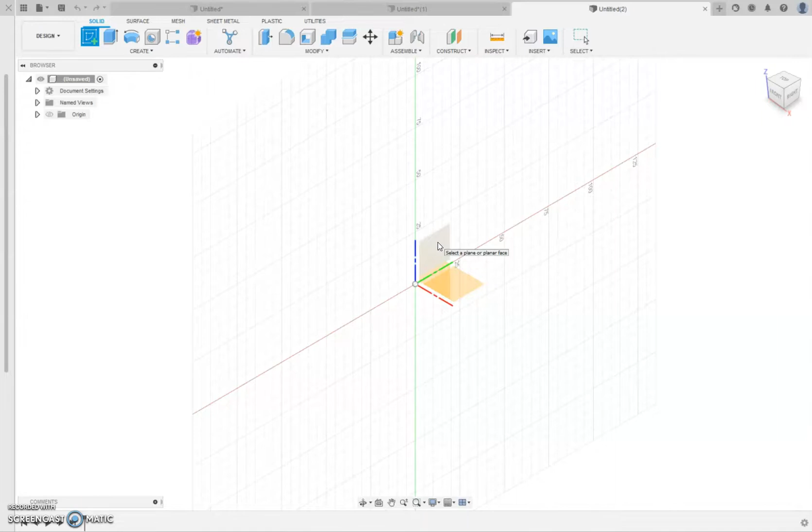I'm going to do a new tool today that's going to look at patterns. Basically, if you have something that has some sort of repeating grid or repeating feature, you can use this. There's a two-dimensional variation of it, as well as a three-dimensional variation of it, so I'll show you in 2D. Right down here, we do have mirror, which copies over a line. We have circular, which copies around a shape or a spot, and we have rectangular. But for this one, I'm just going to focus on rectangular pattern.

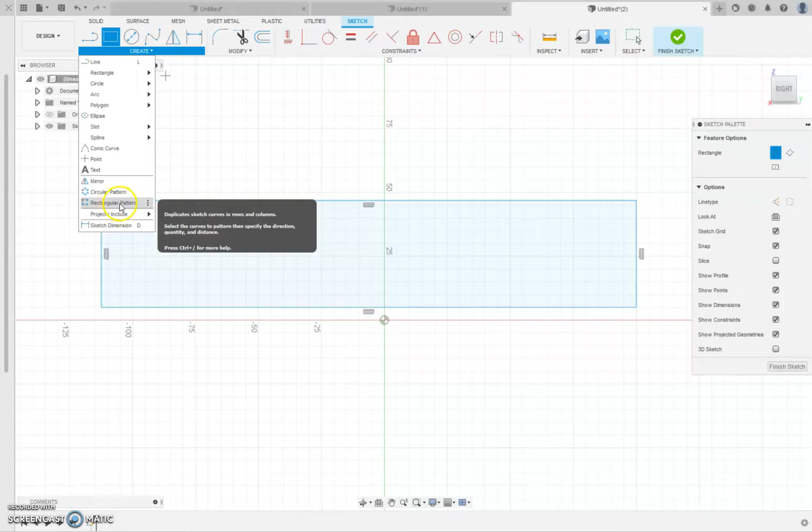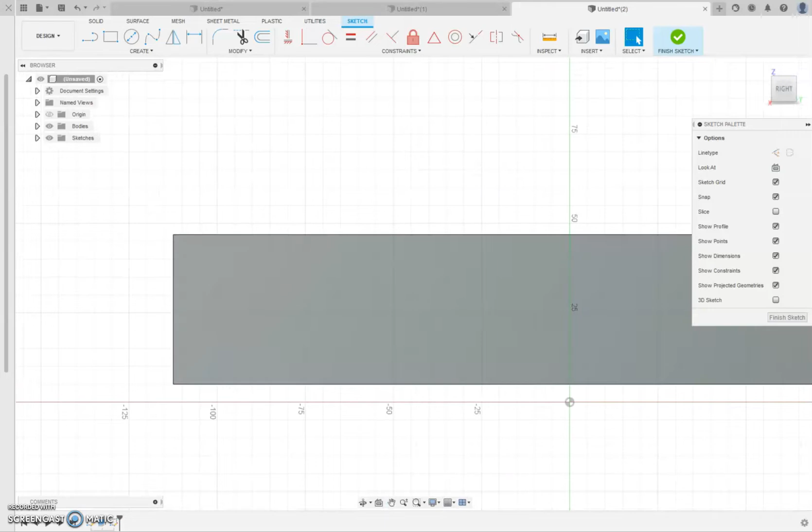I have another idea to do something with circular pattern. So we're going to do rectangular pattern, but we're actually going to use this tool in 3D. I want to make sort of a rack for like a coat. I'm just going kind of quick, just to get this set up because you already know how to extrude. Now I want to make like a coat rack, so maybe I'll do some type of hook thing. If I want to place this hook thing, I'm thinking it's going to go somewhere like maybe here.

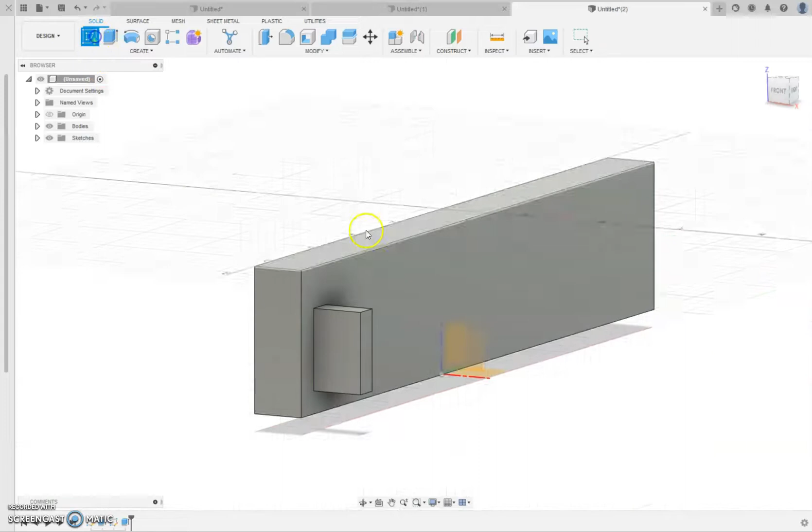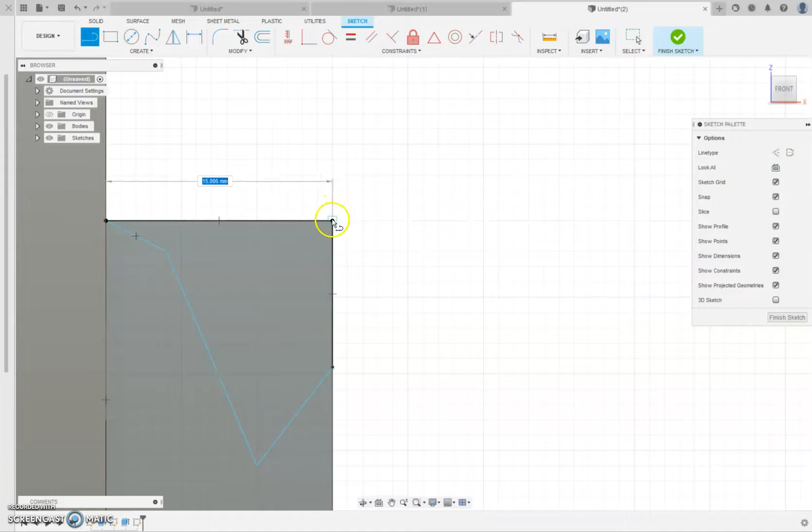Okay, I think I'm going to extrude it, and I'm going to cut out the shape I want. So think of this as the solid, and then I'll put another extrusion on the side of this, and then punch out something that's going to give me a hook shape. You could use arcs. It would make it look more smooth. Now, with negative cutouts, you do need to make sure it is a completed shape. Generally, you know if it's a completed shape because the middle turns kind of a bluish color. It didn't do that for me here, but let me see if it still works.

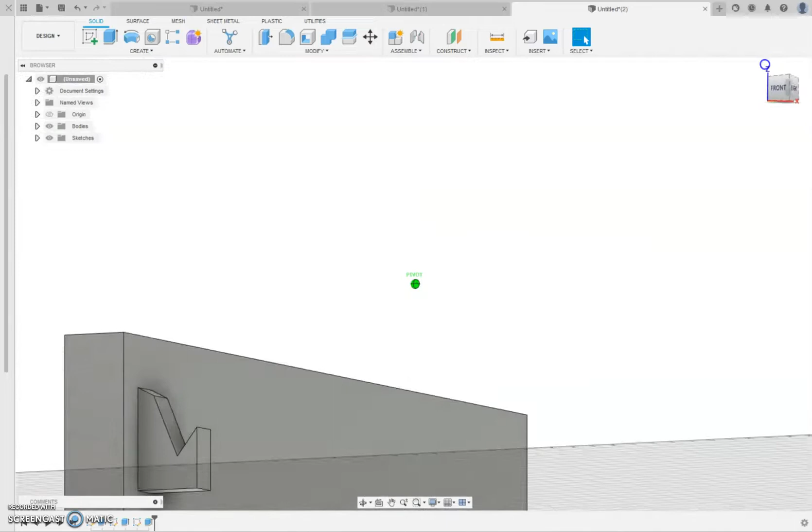There we go. So let me select these separately. So I will select that. I will push it in, and it's figured out I want it to be a cut. Cool. So now I have a hook. But I want hooks along this whole thing, and I want them evenly spaced because I'm the designer and I want it to be a certain way.

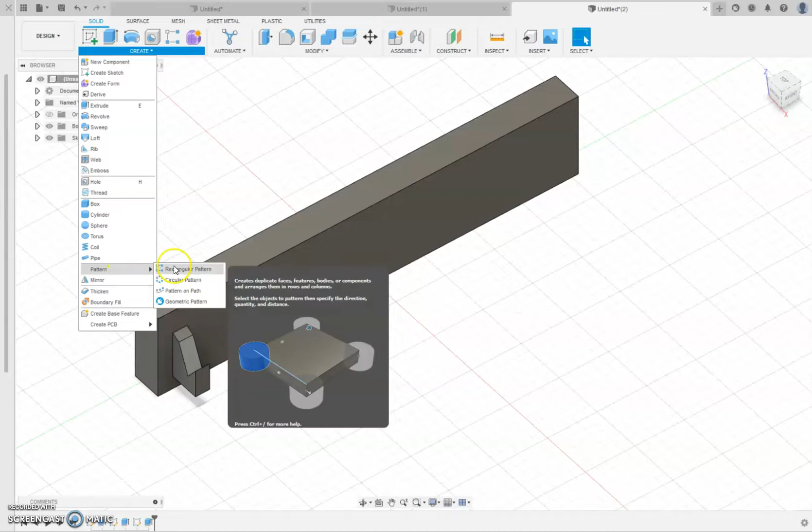So the tool for the pattern looks the same as it did on the 2D menu, and I can still get it from the drop down here. So there's mirror, and then there's pattern, so there's a rectangular pattern or the circular pattern. I'm going to use the rectangular pattern, which is in the shortcut menu on mine right here. What this is going to let me do is select a feature and copy it.

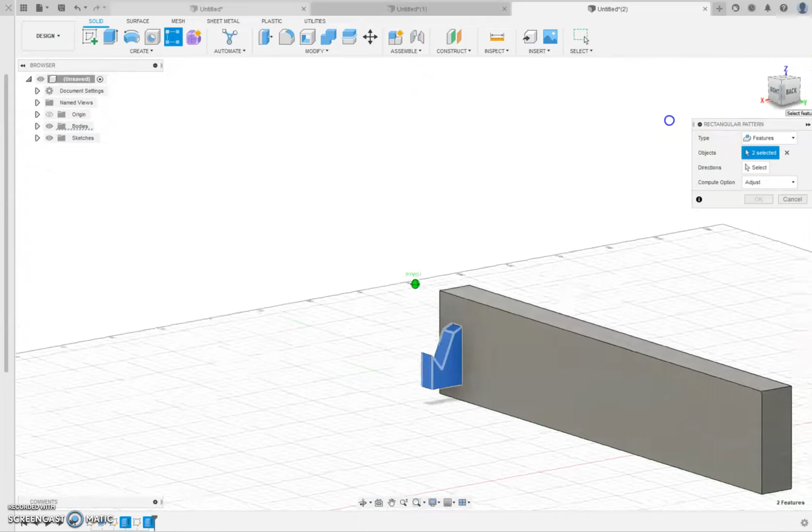So let me see if I can select features. There we go. So I want to select all of this. Just make sure it's all selected. If you don't change this, the body, technically this whole thing is a body, and we haven't covered that yet. That's going to be a little bit more complicated, but we'll talk about that in a little bit. So I'm going to have that feature, and then for direction, you can select anything that goes in the direction that you want it to be.

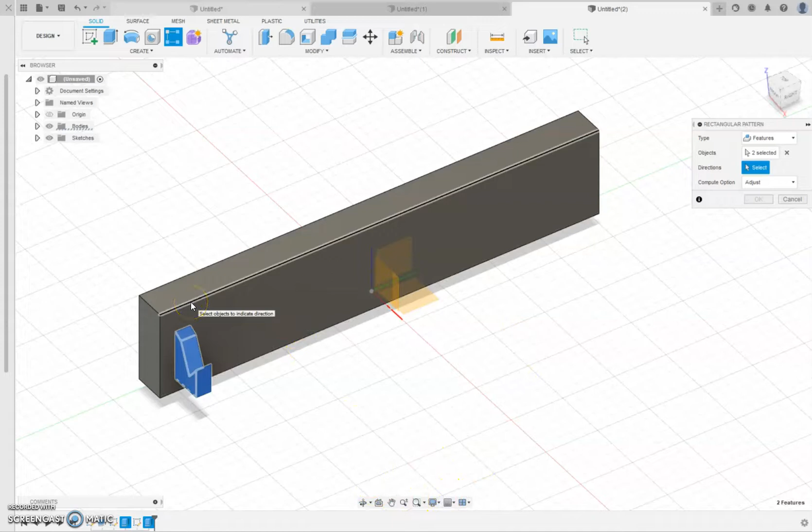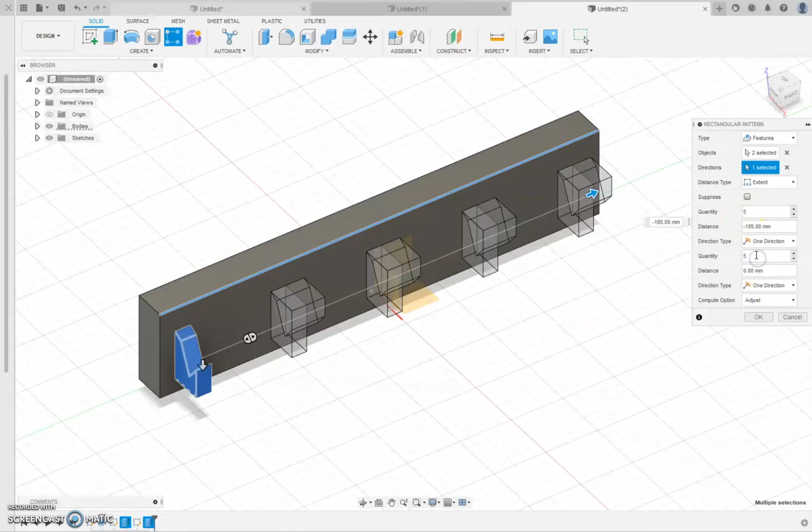What I mean by that is this edge goes in the direction that I want this to copy, and then I can move it along that edge, and it's going to make the copies I need. Now I can tell it I want maybe 5 hooks. Oh, whoops, I accidentally selected in the Y, or the wrong direction. So there you can go in 2 directions. If you want to, you could also copy them vertically. If I move this down, it'll show me what it would look like for the 5.

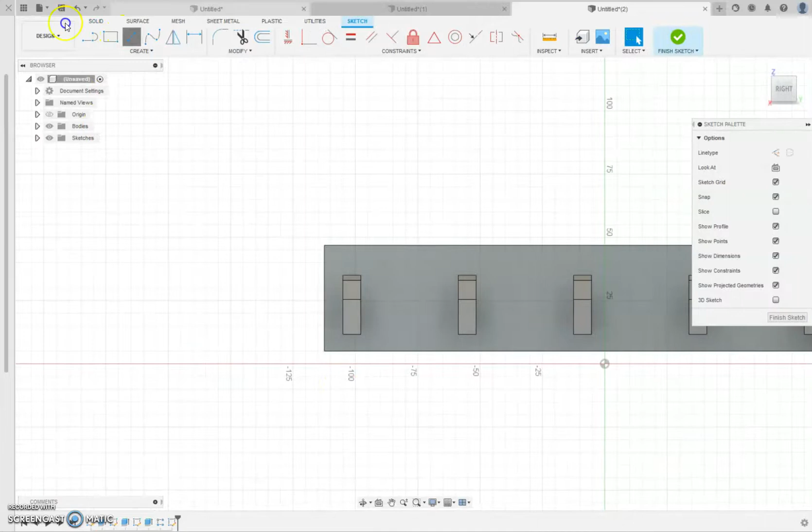But I actually don't want copies that way on this one. So I'm just going to do that one. So there is 5 copies. And although there's a lot more with this, that's just what I'm going to go with for now. What I'm going to have you do is come up with something that has some sort of pattern on it, some sort of feature on it that duplicates.

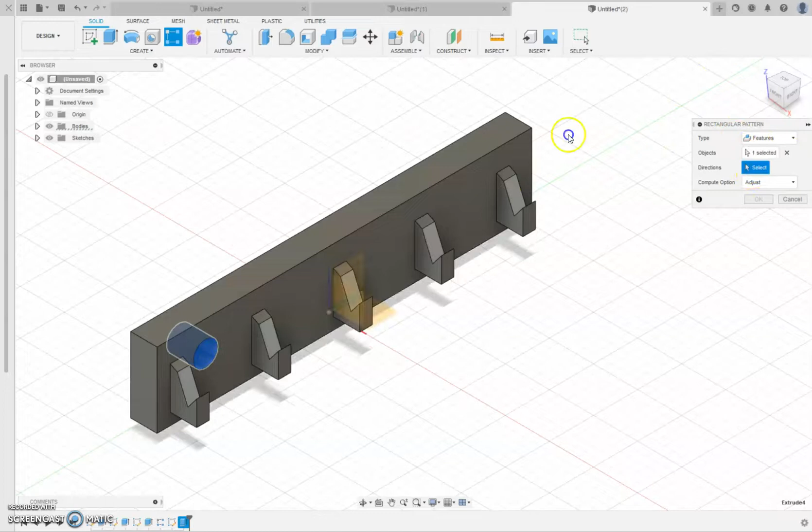Another cool thing with this is negative cutouts are also patternable. It's a feature. I can select that feature, and I should be able to select the direction and go along this. Do 5 again. There is no basis to what I am doing right now. It's just kind of seeing what I can get away with. Alright, then we go 4.

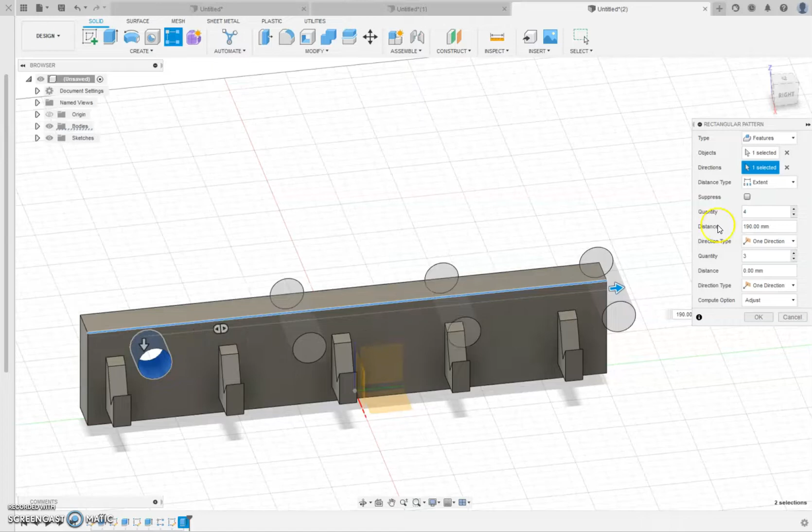So it actually has pieces. I can move this one back to here. There we go. It's okay. So I patterned the negative space as well as the positive space on this one. So you can do whatever you want as long as you are doing some sort of pattern with the features.

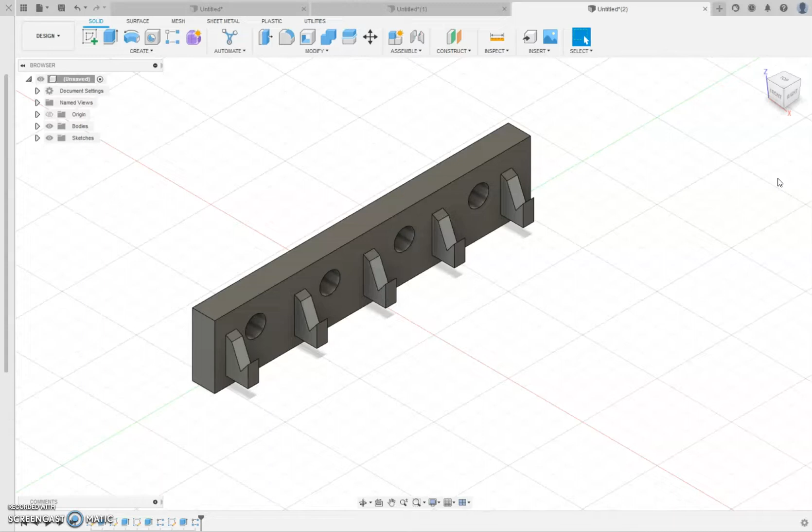Don't forget, if you click on pattern, the type, you're going to want to make sure you select features. It's default on bodies, but I'm going to want you to change that to features so you can select the parts of your piece that you modeled. So for this assignment, anything you want to make, as long as it is a recognizable object, try to create that using some type of pattern, positive or negative.